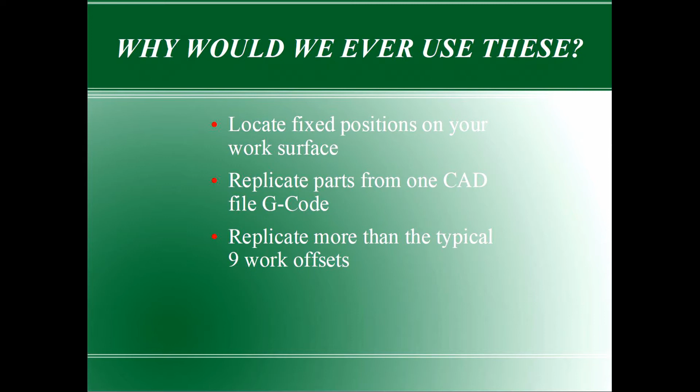Also, you can enable custom positions for tool height settings or tool changes. There's so many different things you can do with work offsets. You don't necessarily need an extended work offset for a tool change, but it's nice to have those available.

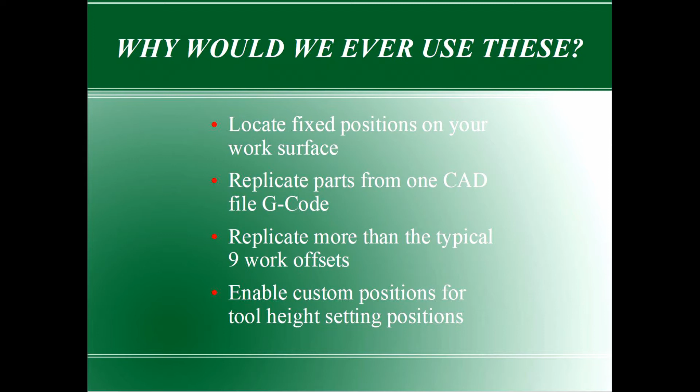So what is homing a machine? Well, it's a specific position that the machine goes to so it knows exactly where it's at in its work area. It's typically done with limit switches or some way to tell the machine how far the X, the Y, or Z has traveled to its home location.

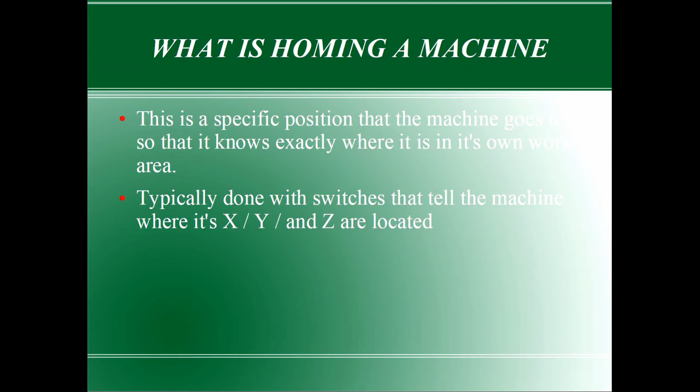Then you have to have your data on how far the machine moves in each position, and you usually enter this into the software, and it'll tell the machine how far it can travel. That way you can kind of enable soft limits and whatnot.

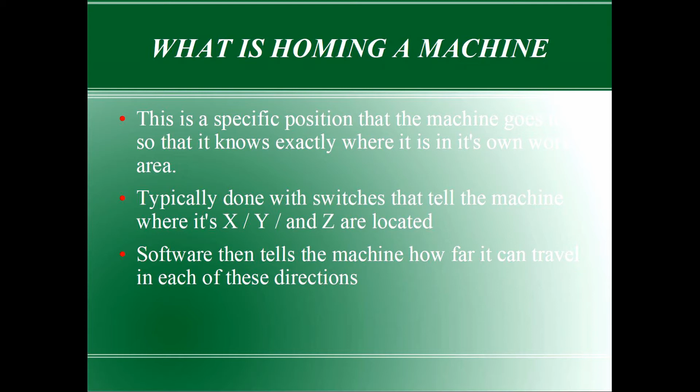Once you home the machine, it puts the machine in machine coordinates mode. That way it knows exactly where every position on that table is at any time. All you have to do is home the machine, and once you call out your positions, that's where they'll go every single time. So technically there's no way to recall a specific position with any accuracy unless you home the machine with micro switches.

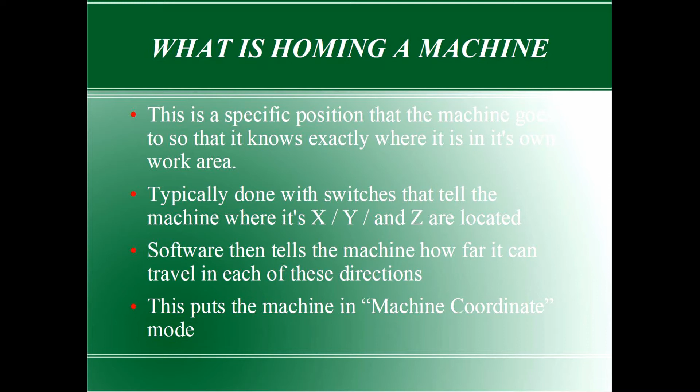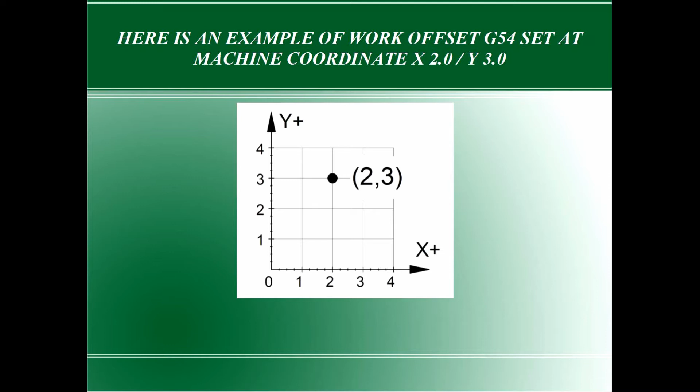So here's an example of your work offset: G54 at machine coordinate X 2.0, Y 3.0. It's a simplified layout of a homed machine. Here you see the scale 1 to 4 going in Y, 1 to 4 going in X, and then 0 in the lower left corner. The 2, 3, there's your G54 position.

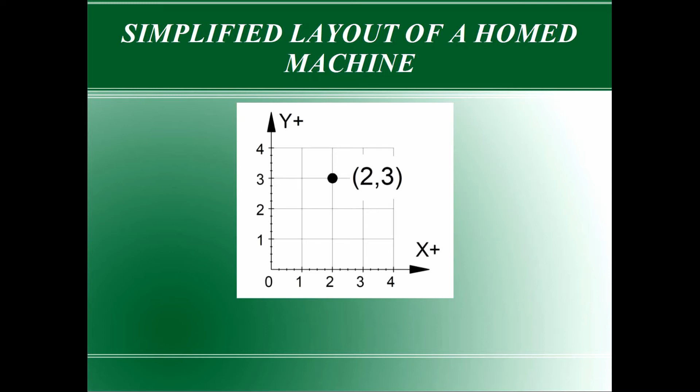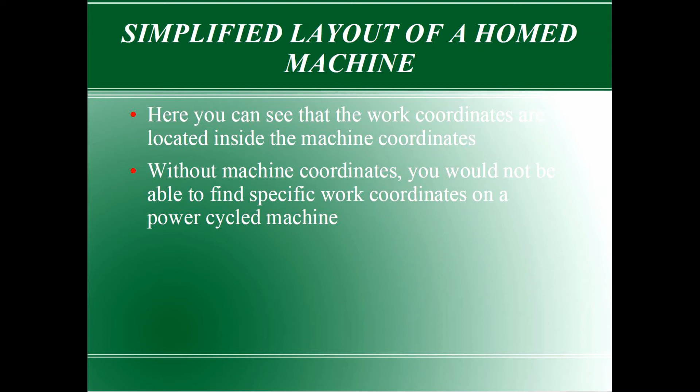Alright, so there you can see the work coordinates are located inside the machine coordinates. That's the way it works. Work coordinates are located inside your machine coordinates. There's no way to accurately recall the work coordinates unless you know the machine coordinates. So without machine coordinates, you would not be able to find a specific work coordinate on a power cycled machine.

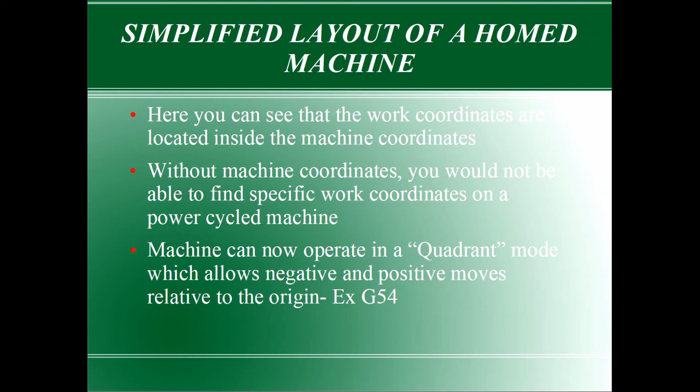The machine can now operate in quadrant mode, which allows negative and positive moves relative to the origin, for example G54. So with this, you can see the dead center is your G54. 1 would let you go in the X positive, Y positive position. 2 is X negative, Y positive. 3, X negative, Y negative. And 4 would be Y negative, X positive.

So if you already had a job that was not completely done, and it was located in G54 or G55, and you had a job come in the shop that you wanted to do and not have to take them out of the vise, you could start it at G56, G57, or G58. It wouldn't matter. As long as your machine's homed and you have an offset table or a way to record these positions, you can start the job at any position you want. So to access these positions, we need a homed machine and a work offset table.

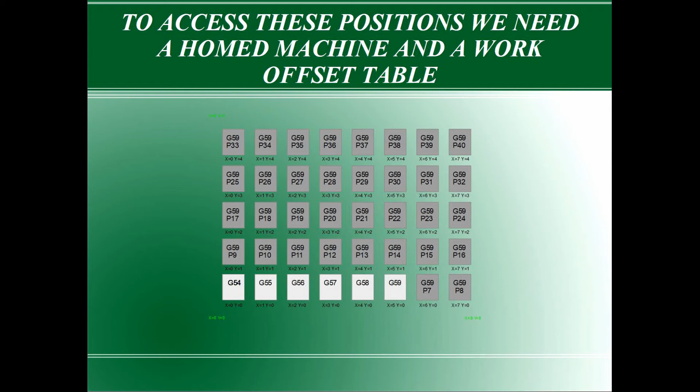The darker squares are the extended work offsets. Not all software is going to give you these extended work offsets. So if you don't have the capability of a work offset table, you're limited to possibly 9 positions maximum. So here's G54 on a homed machine, 55, 56, 57, 58, and 59.

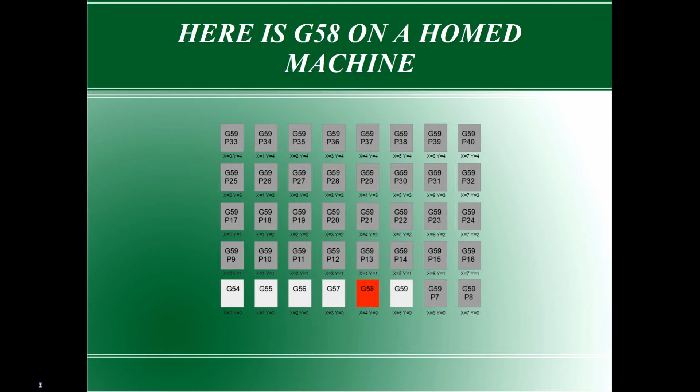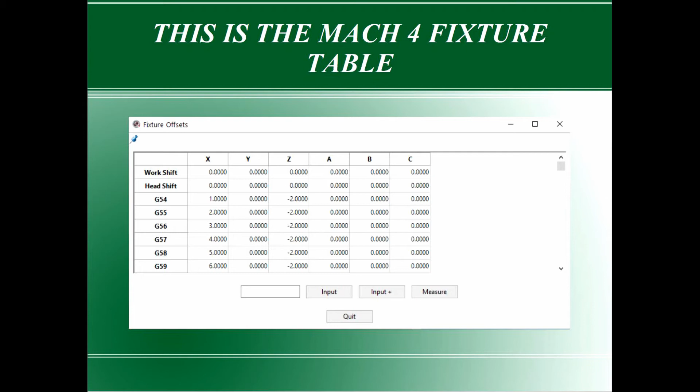So do you not have a fixture table? If your control software only lets you jog to the position and select the offset position, you're limited to how many different fixture setups you can have on your table.

With a fixture table, you can manually enter the X and Y positions of your vises or work holding fixtures located on your work surface and start working. So you could have a setup sheet and you can actually go in and say, okay, here's the new fixtures that we're going to run for the whole week. You could manually enter these numbers in a fixture table and put all your parts down, hit go, and start cutting.

With a fixture table, you can manually enter the X and Y positions of work holding fixtures located on your work surface, and start working, like I just said. Without a fixture table, you will have to jog to each vise or work holding position and manually zero each position before you can start working. You'll notice on the software, some software only has it listed G54, 55, 56, 57, 58, and 59.

So what you would have to do is jog your table over to your second vise, select the button that says G55, hit 0, X and Y, then jog over to G56, hit X and Y. You know, you can do it. It's just a fixture table that lets you manually enter in information, makes it a lot easier.

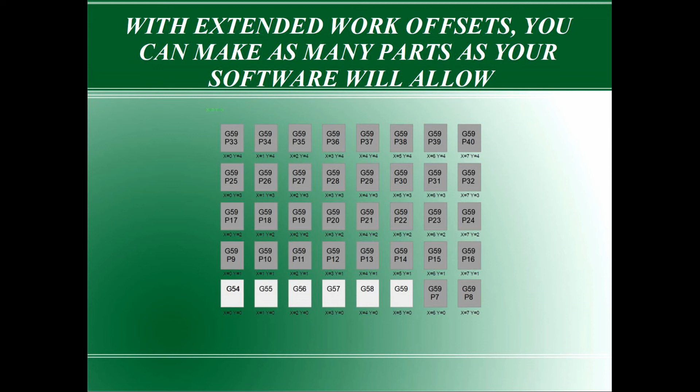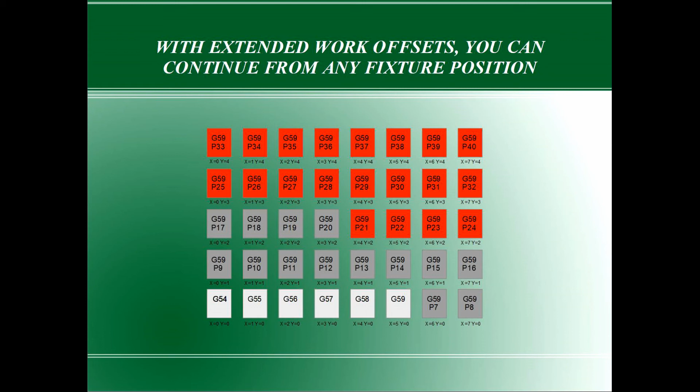So with the extended work offsets, let's say you've got 100 parts on there. Well, right here we have 40 parts. Let's say I break a tool at P20. Well, I can change the tool, re-zero the tool, and start the job at G59 P21 and continue on.

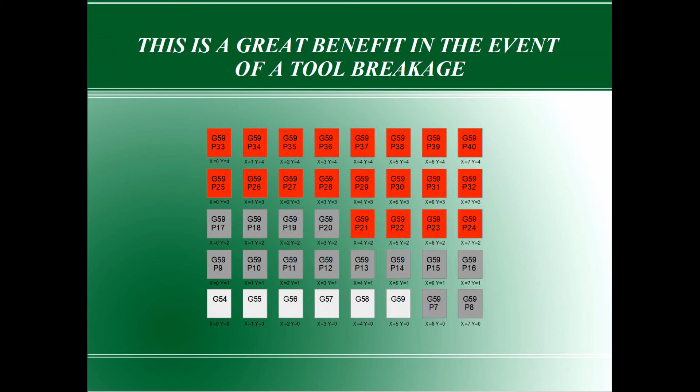It's a great benefit in case of tool breakage, or if you have something happen with the part, it slipped out of a vise, you can stop the machine. You don't have to cut air on G54 all the way to G59 P20. You can start it at P21.

So what if my software does not use a fixture table? Well, I read about the G10 command, and from what I can gather, this would actually fill in the fixture table for you. I'm not sure if the G10 would actually work on a software that does not actually have a physical fixture table available, but it seems like it would. Just search your manual and see if you can use the command.

Some of the software only supports L2 and not L20. L2 is just the G54 to G59. The L20 is G-code that does the extended fixture table. So, like I said before, Mach 3 only supports the L2. Mach 4 does L2 and L20.

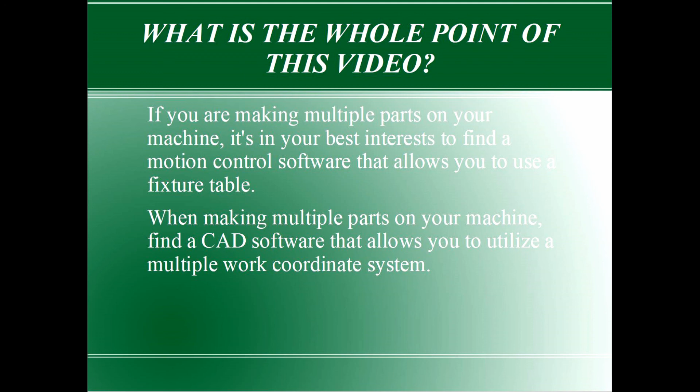Alright, so if you're making multiple parts on your machine, it's in your best interest to find a motion control software that allows you to use a fixture table. When making multiple parts on your machine, find a CAD software that allows you to utilize a multiple work offset coordinate system, like Fusion 360. Find a motion control software that you can afford. Mach 3 and 4 is totally affordable. I've not tried any of the other ones, and I would be totally open for any suggestions.

Find a CAD program that you can afford. You can get a free version of Fusion 360, but I prefer to use the paid version. That way I've still got some limits, but I don't have any of the limits that a free version does.

Find a CAD program that has the best online support from multiple users. The Russian company, PureLogic, PUMOTIX, there is no support out there anywhere. You just got to read the manual and figure it out on your own. That sucks, and I don't like it. Software performs great, but it has no support.

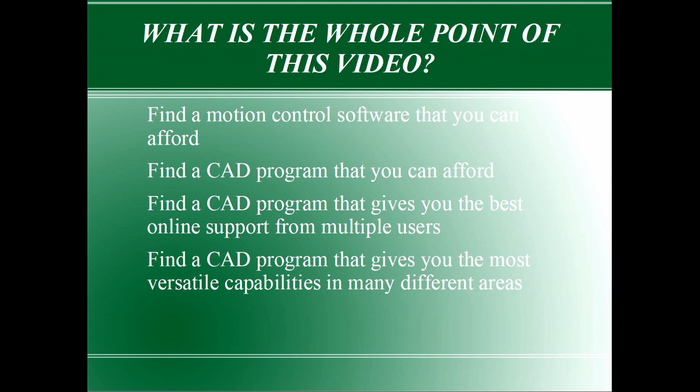And find a CAD program that gives you the most versatile capabilities in many different areas. Love Fusion 360. Some of you guys hate it, but it is pretty versatile.